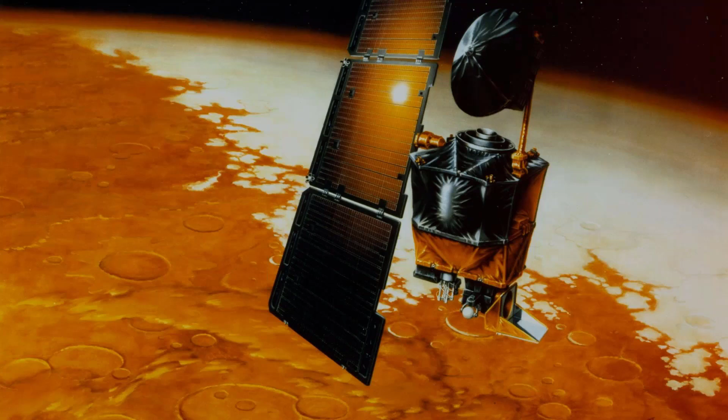Let's dive into this. Back in December 11th, 1998, NASA launched the Mars Climate Orbiter satellite. It was interesting because this was the first interplanetary weather satellite designed to gather data on the climate of Mars, as well as serve as a future relay station for the Mars Polar Lander, which was going to launch a few weeks later.

Now, many of you may have heard this story, but an assumption was made: that the software on the spacecraft used to measure the changes in velocity was going to be done in metric, measured in Newtons per second, while the software on the ground used the imperial system, pounds per second.

This was something that NASA was still very much ingrained in doing, but it meant that every adjustment to the satellite's trajectory was off by a factor of 4.45. During the 9-month cruise to Mars, 7 adjustments were introduced to the trajectory of this satellite, meaning that when it arrived, it was 105 miles off course, and it crashed, never to be heard or seen from again.

This is an example of the domino effect, right? A cumulative effect, Webster defines it as a cumulative effect produced when one event initiates a succession of similar events, and it can have grave implications. Hopefully the implications we're going to talk through today as we go through the data domino effect are not quite as tragic or as grave, but I think you will find that you probably may see some part of your company in each of these as we go through them.

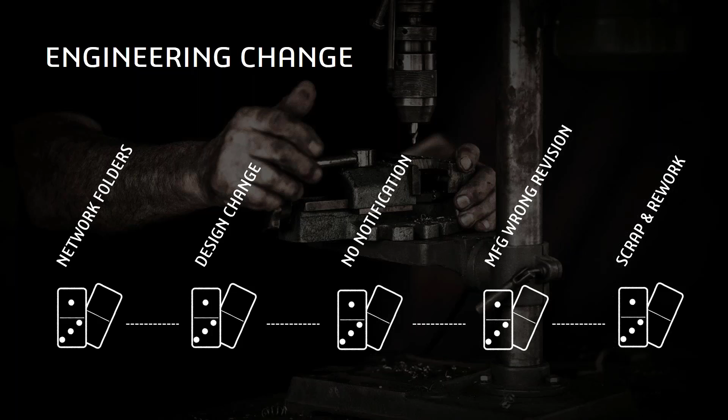So it's these simple things. A lot of organizations have really great people that just make this happen really well, but the reality is that more often than people want to admit, there's this continual effect that occurs and has implications. So how do we address this effect that occurs?

Well, with PDM tools like SolidWorks PDM Professional, we get a secure environment where we can log in and make sure that the right people have the right content at the right time. It manages revisions for us, so not only do we capture the revisions, but part of that secure login is ensuring that users are seeing what they should see. It has powerful workflow capability, so I'm notifying people when those changes are occurring, and that happens in an automated fashion.

So with that, let's take a few minutes and look at how we can solve this with simple and powerful tools like PDM Professional. Here I'm securely logging into my vault. You're going to notice it's a really comfortable environment, it still looks and feels like Windows Explorer. The benefit though, as I zoom in here, is you're going to see that I've got visibility to exactly the state that each of my files are in. So some of my files are pending approval and some of them are a work in process.

The added benefit here is that I have eDrawings Professional built in, so I can snap measurements. If I want to look at this design to make sure that it's what needs to be approved, I can do that. I also have full traceability to all the versions and revisions, so I'm not having to move files around or append their file name with Rev B or Rev C. I can just select the file and pick the revision I want to look at.

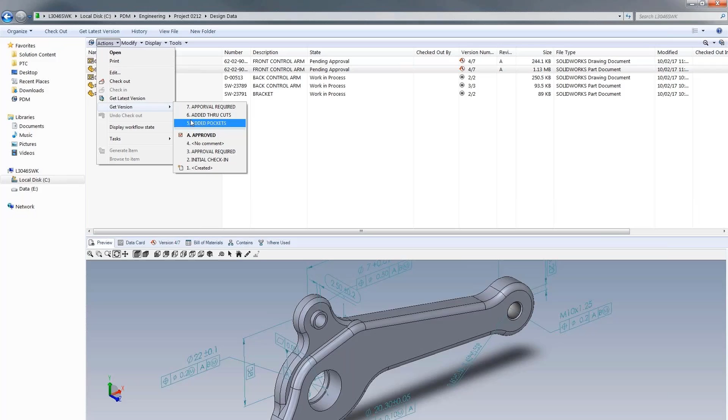We can look at the design as a whole. So that's the last approved. I can pull up the incremental versions. This is a really important aspect of PDM, capturing the incremental versions occurring on my way to the release. Here you can see we had some initial design with some pockets. The final design being submitted for approval has those pockets pushed all the way through.

Now at this point, I can decide to go ahead and approve it, but maybe I want to see what the workflow state is. Right now it's in a pending approval. I get great visibility to what's the next stage in the workflow. I'm going to decide I like the design, I'm going to go ahead and issue my approval, and we can right click and change the state to approved.

Now here I'm doing a parallel approval, so I'm not only able to capture workflow, I can do fairly complex workflows. You can see that Mark's already provided his comments, his feedback. He likes it, I'm going to approve it as well, and it's going to double challenge me for my password. So if you're in regulatory environments where digital sign-offs require you to add your password a second time, we can do that. And now my design is in a state of released at revision B.

Now, this is great from an engineering or management standpoint. I haven't had to move files around and track all that craziness. It's just very focused and very cleanly done.

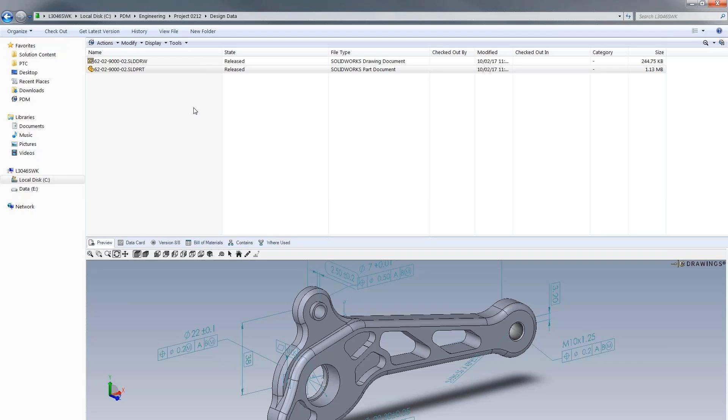When we look at this, it's extremely powerful in its ability to put an end to this idea of the data domino effect when it comes to engineering change. So much so, when we look at companies like Apco, Apco Automation is a great company that does design automation equipment here in the States. By implementing PDM, they were able to reduce their scrap by 50%. They said, since implementing PDM, we have the foundation in place that we need to automate our processes, eliminate waste, and remove unnecessary costs. Solidworks PDM has allowed us to really ramp up. It's just a great testimony to this idea of tools like this can really affect the ability to stop the data domino effect in engineering change.

And when we stop it, we can reduce scrap, right? When we put an end to it. All right, so that's scenario one. Oftentimes we see this play out in organizations, big and small, it doesn't matter. So let's look at scenario two. How does this cascading effect often manifest itself in product development?

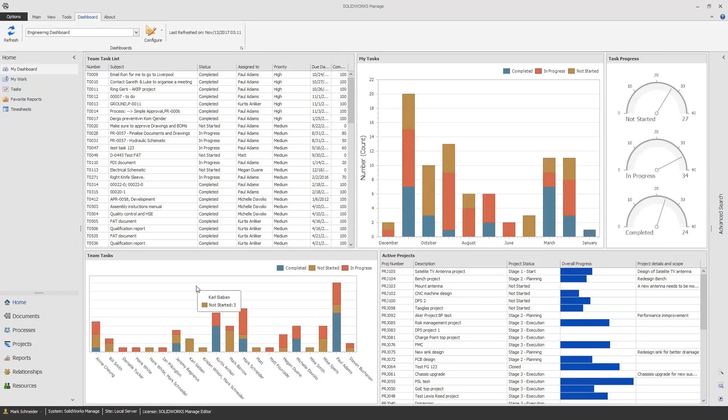When we dig a little deeper and start to look at the projects, we can actually dig in and view each project as a record and view its Gantt chart, so I can get an understanding of where each of the stages of the project are, and it's easy to drag and drop if I need to move a stage out. I can assign resources to each of these stages, and I can have tasks associated with each of them as well. Tasks are great because they drive the stages, and people can provide input to each of these tasks.

Now, the other nice thing is we can create tasks on the fly. So maybe I decide, well, we're having some failures on this design, and we need to do some additional simulation at this stage in the project. So I can initiate that task and get some feedback from users on how much time they think it's going to need. Initially, I'm going to do 16 hours.

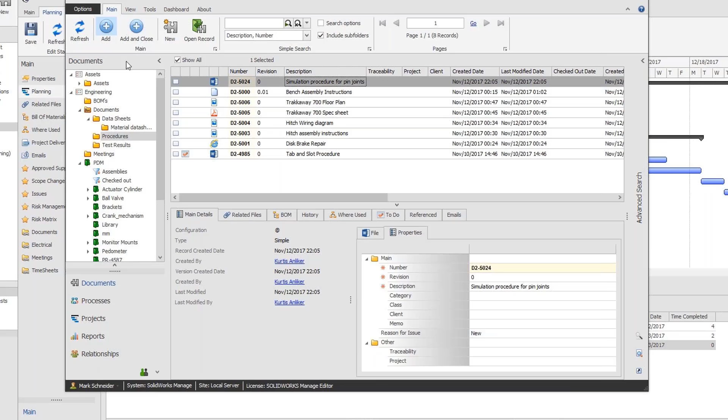And this becomes really powerful because Manage is connected to PDM. So I'm able to browse right into the vault, search for the part or the assembly that I want to run the analysis on, and attach it directly to the task. I can then assign it to the user that I want to run the simulation, and now at this point, I've captured this as

part of the stage of this project. This task now will show up on Ian's home screen when he logs in to Manage, and all the things that he needs to do are captured and put together in a nice clean location, so he can immediately start doing his work.

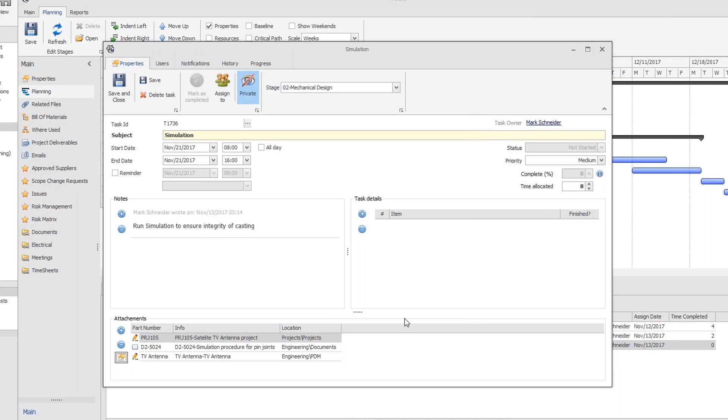What's also nice with this is that we can come in and we can actually have bills of materials captured as part of a project. So for many of you, if you're doing large projects where maybe you're doing a large plant or process design, and it's not just one assembly that you're shipping to the customer, you're shipping multiple assemblies that all make up the bill of material. Sometimes it makes sense for that bill of material to be captured as part of the project itself. This becomes a really powerful way that Manage can capture, again because it's integrated with PDM, we can grab each of the assemblies that make up this project and pull them together into effectively a project BOM where we're defining quantities and whatnot.

What's also nice about this is that you can add non-modeled items to the bill of material as well, so things like packaging or shipping labels or whatnot.

All right, so the other thing I want to highlight for you here is that we can do timesheets as well. So if you have to capture time for an engineer and add it to a task, we can do that. We can also capture time in a timesheet and be able to report on that time. So if you need to give a breakdown of how time is being spent against billable projects, Manage provides a great way to be able to do that.

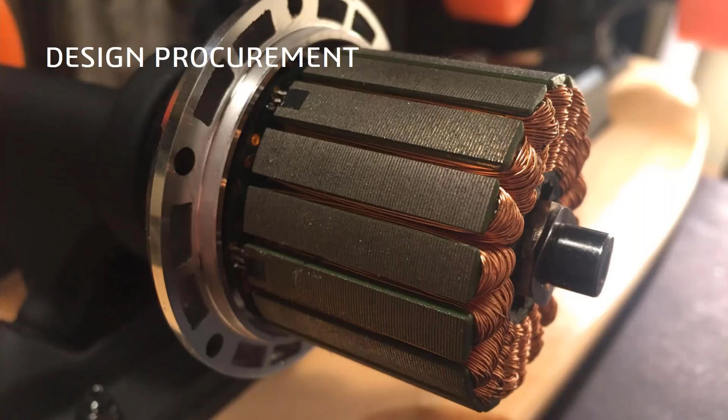All right, let's look at a third and final scenario, and that's in the area of what I'll call design procurement. And when we talk about this, I'm going to illustrate this through a couple different slides. But we'll start with a little bit of a story.

We had a customer that came to us and basically said he got a call from one of his suppliers, and he said, I love doing business with you, but do you realize that your company is requesting pricing for the same electric motor repeatedly? And my supplier said, in turn, we're supplying you the same motor under different part numbers. And we also understand that you have requirements to keep spares in stock for each of the systems sent.

So, we're sending you spares for each of those unique part numbers. And a colleague of mine dug into this a little bit and said, why is this happening? Why are you ending up with the same electric motor ordered multiple times under different part numbers? It boiled down to the fact that in their company, engineering project managers had the authority to source components if they couldn't find them in their system.

This is a really common situation where we run into the reality of having multiple business systems in an organization. You probably have an ERP or MRP system. You may have, hopefully, PDM Professional where you're storing documents. Oftentimes they serve different purposes and capture different information, but it's valuable information.

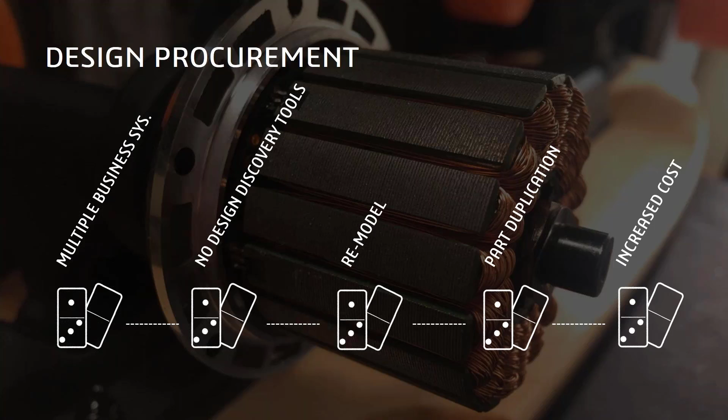So what happens here? Well, increased cost, right? It's expensive to introduce a new part number. Just to give you some context on this domino effect, Aberdeen recently did a study that found 45% of engineering time is spent searching and recreating designs if they can't find them. And for context, the annual cost to introduce a new part number, in US dollars, is anywhere from $4,500 to $23,000. There's a wide spectrum there.

In some industries, maybe machine design that isn't highly regulated, the cost of introducing a new part number is lower. But you get into highly regulated industries like aerospace, and the cost to introduce a new part number is extremely high because of all the validation, all the tooling, all the subsequent things that go along with introducing that part number. So how do we go about curbing this?

Well, let's take a minute just to do a quick whiteboard. We talked about this idea that a lot of companies have multiple business systems, whether PDM, network folders, ERP systems, homegrown databases, etc. So there's all these different locations where the data exists.

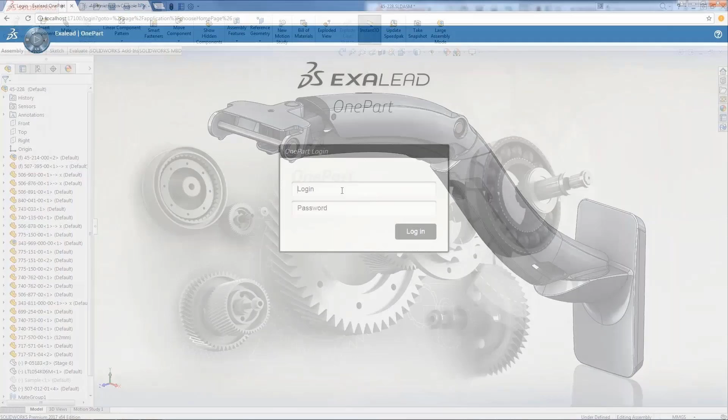So when we look at a design like this, you may have one of these in your company. This is a monitor mount for a TV. We've got to design a bracket for the end of it. OnePart allows me to log in, look at all of my data across multiple sources, and I can start to do a search. Now, what's nice is as I search, I get search-ahead suggestions about what I'm looking for.

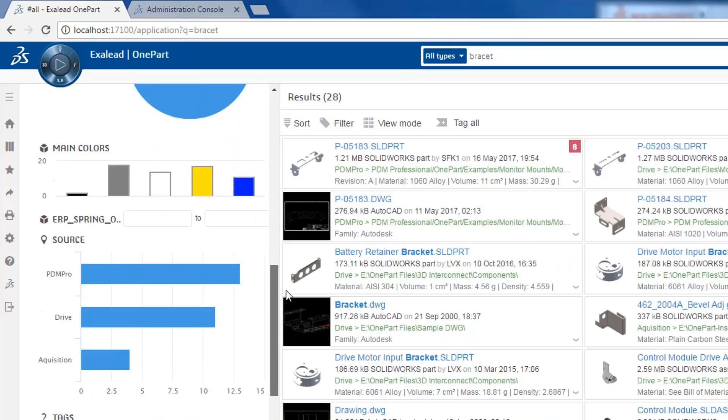I'm actually going to spell this wrong - this name, bracket - wrong, and it still finds results for it. Use the analytics on the left-hand side of the screen to say, okay, I'm indexing a couple different sources. I'm indexing a PDM environment, I'm indexing a network drive, and I'm indexing maybe a drive that we acquired through acquisition. This is a fairly common situation - you get a bunch of data from a company that you've acquired, and you don't even know what you've got.

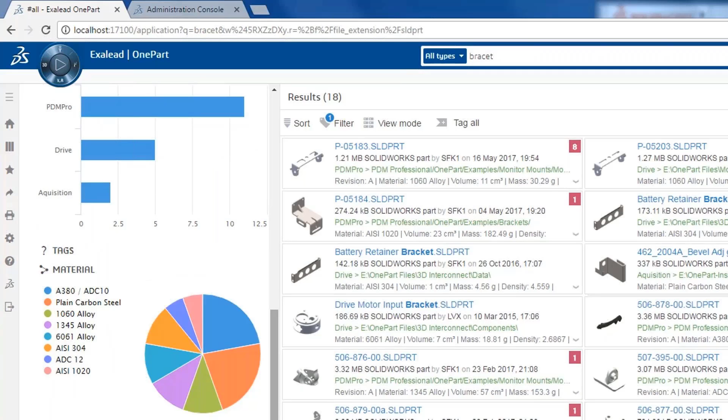I can use the analytics to further drill down. I'm going to use material to filter what I'm looking for. It's very visual. I can graphically select exactly what I'm after.

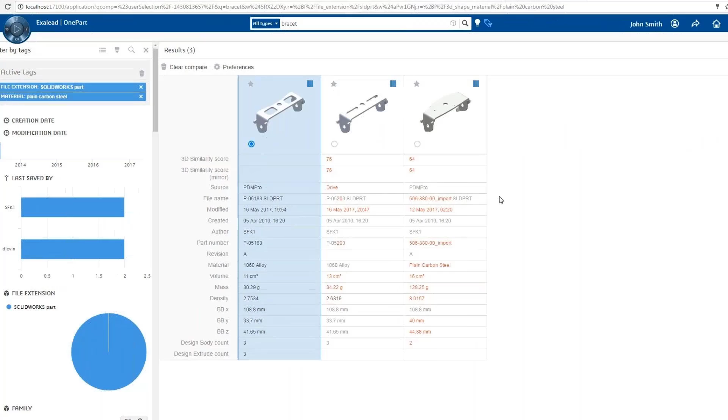Then I can use almost like a shopping approach. I'm going to select 3 brackets that I find interesting, and put them into swim lanes so I can compare their data. I can start to make some interesting decisions about whether weight is an issue. Having them side by side makes it nice.

I can see this one's awfully heavy, so I'm going to take it out of the running and just focus on these 2. At this point, I can select on the design and start to look at its details a little closer. All its metadata is presented to me.

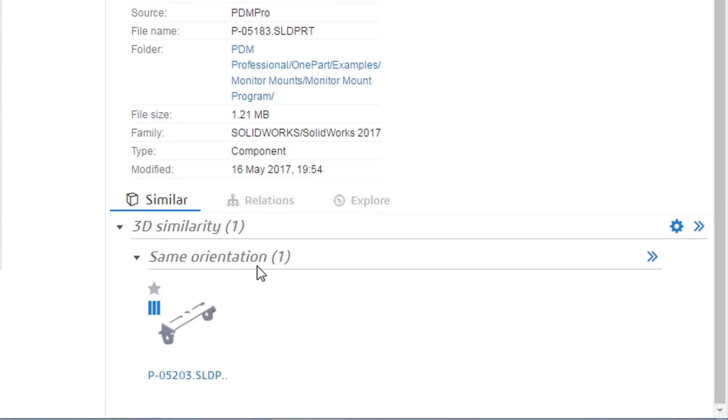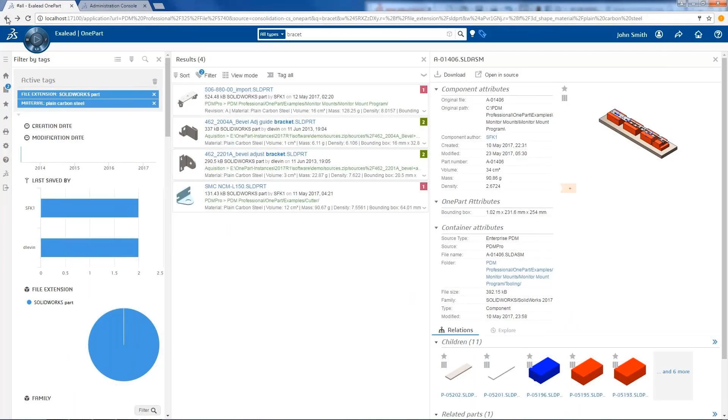I can see similar parts. If I would have found this part, it would have given me a similar design, but it's also correlated with supporting information. This already has a flat pattern DWG that's been created. It has a PDF for purchasing. The Solidworks drawing is done, and it shows that it's being used in an assembly. So I already have tooling that's been done for this part. This is really powerful information when I have to decide, first, do I have a design I can use? But second, which is the better one to leverage?

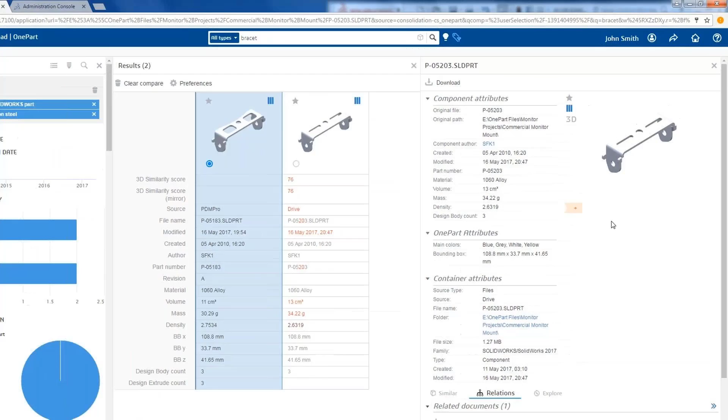All of my configuration data is extracted out of PDM Pro and presented to me. But likewise, I can select the other part that I'm considering. When I look at this part, I've got a drawing, but I don't have any of the tooling created. None of the manufacturing DWGs are done. So there's going to be some additional work I have to finish if I'm going to use this part. Nevertheless, it's a good part, and it needs to be brought into our PDM system.

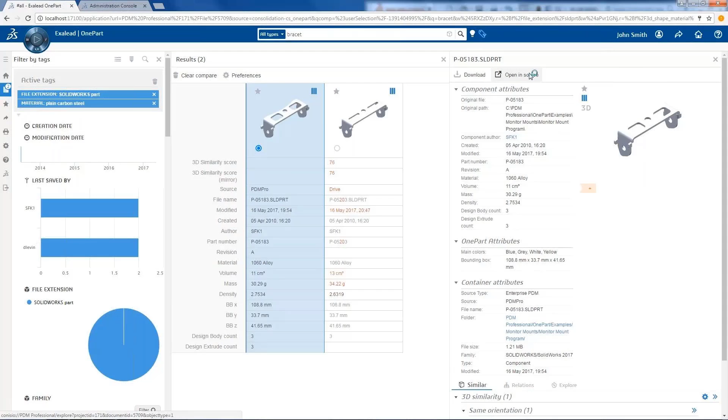I can actually utilize OnePart to tag components. This is pretty neat. I can tag them with information and use that later in my searching. What's nice is the part I want to use - all I have to do is hit open in source. Immediately it takes me to my PDM environment, and I can simply drag and drop this part from PDM directly into my SolidWorks design.

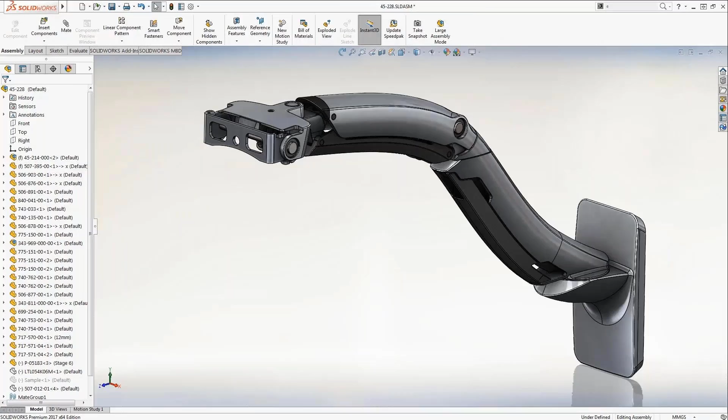Simple. Let's look at another scenario that can often play out for the same design. Maybe I'm looking for a purchased part. Now this information may be more suited to live in the ERP system. What's nice is that I can overlay ERP information like manufacturer, and in this case also capture spring size. So I'm going to use that to help filter.

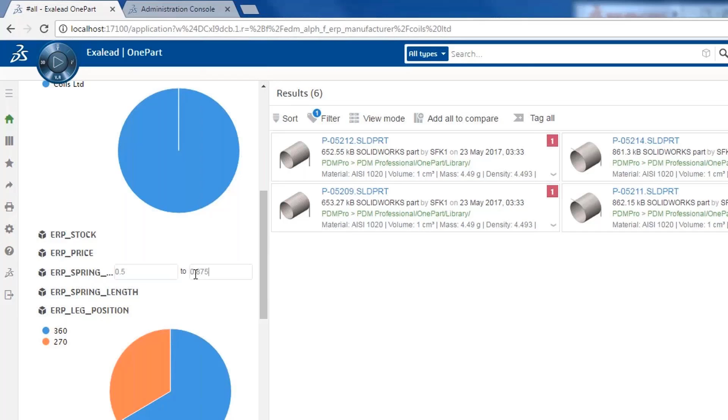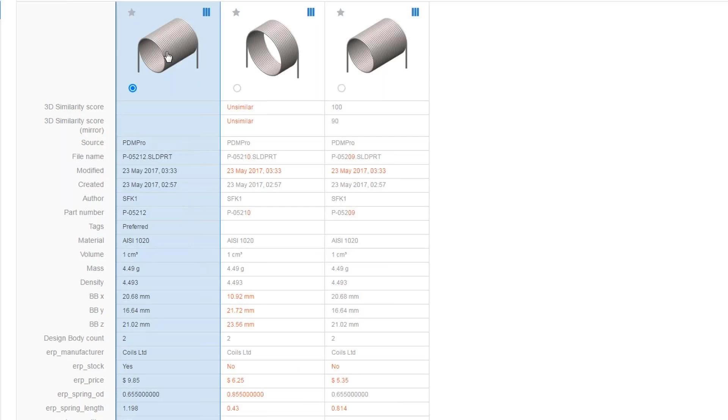When I put my designs next to each other, when I grab the same concept, I'm going to put these into swim lanes so I can compare them. Again, I'm overlaying price data that exists in the ERP system onto my designs. I'm also overlaying information like whether or not we stock these parts. So it might make sense to utilize a spring that both we stock and that meets my requirements. Again, I can use open in source and simply drag and drop it directly into my design.

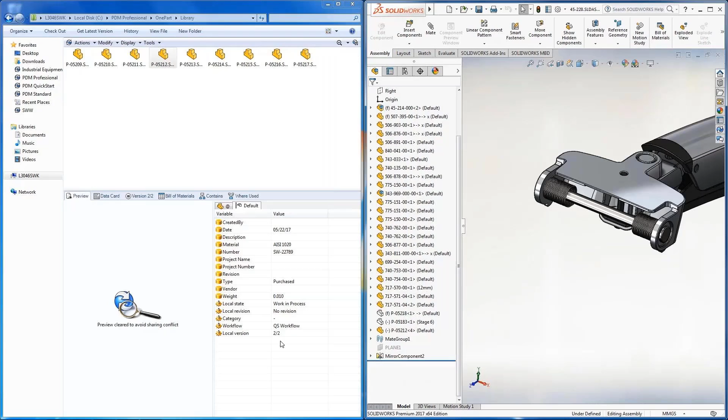So it becomes extremely powerful to uncover and discover data that you may have in your organization by utilizing OnePart.

This is a great Dassault customer, Bird Technologies. They make many RF signal devices, and for them, when they implemented OnePart, it was a 75% reduction in their duplicates going forward. This quote sums up why: with EXALEAD OnePart, information search has been reduced from an average of 4 minutes per search to just a few seconds. And that speaks to adoption too - if I can find things faster and find value in the results, I'll use it more, and I'm more willing to find designs that I want to use or that might exist in our company.

All right, so we've looked at how we can stop the data domino effect inside of engineering change. PDM Pro helps us to reduce scrap. We've looked at product development, how we can curb that with SolidWorks Manage and gain efficiency. And in design procurement, we can leverage OnePart to help us reduce cost.

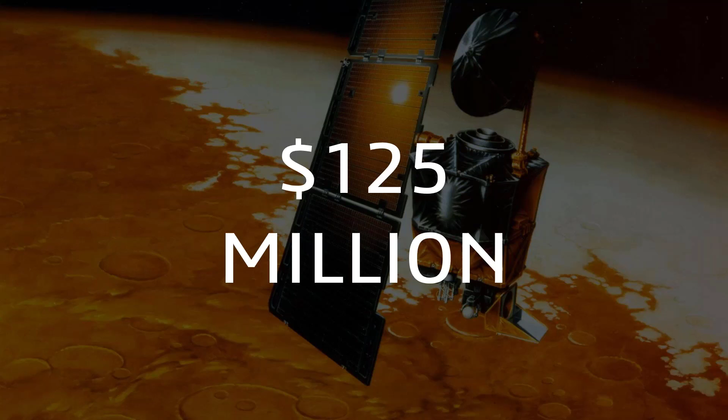And you've probably inferred this through much of the presentation, but there really is no doubt that there is cost associated with domino effects like this. We started by talking about the satellite that was on its way to Mars and unfortunately met a very unfortunate timely death. It was at a cost of $125 million. So one decision and seven cascading course corrections ended up 105 miles off course and a cost of $125 million US.

So keep that in mind as you start to think through your own organization. Where are some of those domino effects that are occurring that with simple tools, the good news is, much of it can be addressed, can be corrected. And so as you think about that, visit the launch site, launch.solidworks.com, and visit the distributed data management portion of the site. You can get a deeper insight into many of the new capabilities that are part of PDM Professional, SolidWorks Manage, and OnePart. And thanks for your time.

Michelle, any questions that we want to touch on? Yeah, maybe one question that came up about the version available.

Early on you talked about with PDM, and the question came up: could we limit visibility to only the last revision of any files for manufacturing? So the inbound, or the out of the box tool, allows you to just limit to the primary revisions, but there are ways through the workflow that we could potentially look at just only giving visibility to the latest, and that may mean creating maybe it's a deliverable that's automated that they just have visibility to. Okay, but out of the box with what I showed you, you give the user the visibility to just the released revisions, and they do have visibility to those.